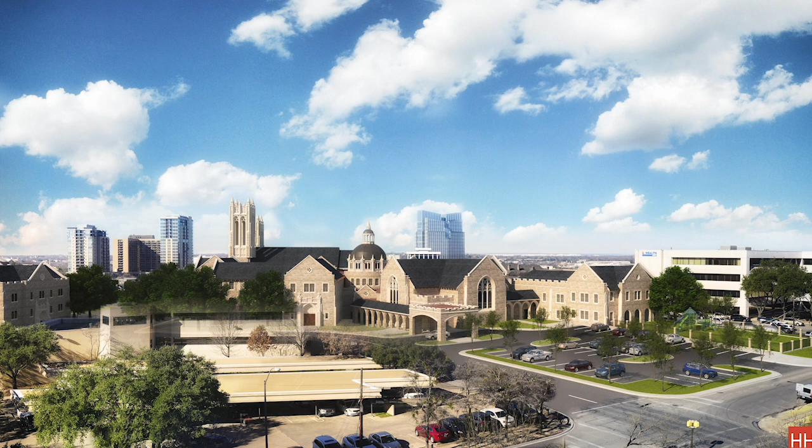Before we take a look at the master plan vision, let's look back on what has happened over the past year and a half or so.

We had a congregation-wide meeting to present the master plan vision in the sanctuary on a Sunday afternoon in February of 2017.

In the fall and winter of last year, we went through the Focus First process of strategic discernment with renowned church consultant Susan Beaumont. The process culminated in a 2-day leadership summit in February, attended by over 100 leaders of the church. The number one priority identified by the summit was to build new facilities and renovate current facilities to meet the growth and ministry needs of the church moving forward.

The Building Study Committee has been hard at work. The architectural firm, with the approval of the trustees, proceeded with the schematic design phase. The Building Committee interviewed several firms to hire as construction consultant to work with the architects to determine the cost of the project. A joint venture of Byrne and Scott Tucker construction companies was selected. And after interviewing 4 capital campaign consulting firms, we selected the firm called Culture of Ready.

Your Building Study Committee has done a stellar job. On your screen, you see the names of members of the committee. Barry Hudson, lifelong member of the church, is chair of the committee, and Tom Birchfield was added recently to the committee to ensure the accessibility of our facilities.

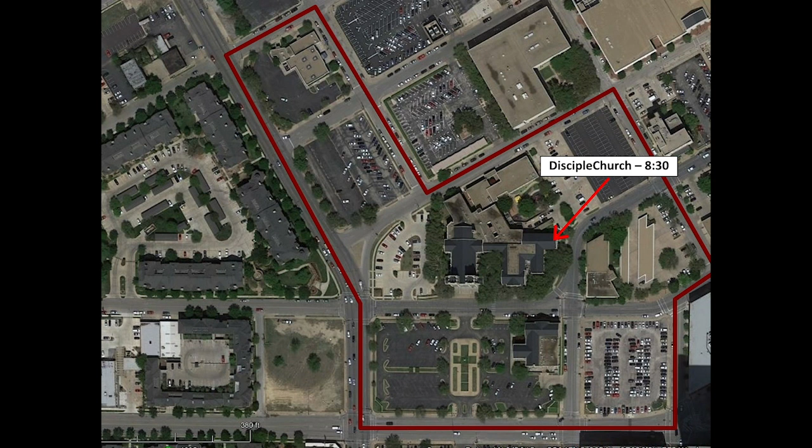Disciple Church meets at 8:30 in the Leonard Memorial Chapel. Traditional worship takes place in our sanctuary at 9:30 and 11. The Gathering is a worship service that takes place at 9:30 and 11 in Wesley Hall.

The 11:11 worship service takes place in leased space at the Center for Transforming Lives, adjacent to our property to the east. These are the primary services which are included in our worship attendance count, but there are other worship opportunities that happen on Sunday morning as well.

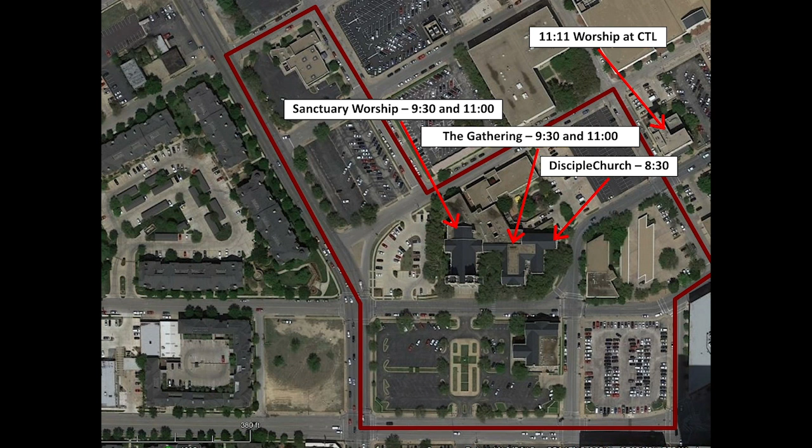Youth worship at 9:30 is part of the Sunday school hour, and a brief communion service takes place in the chapel at 10:35.

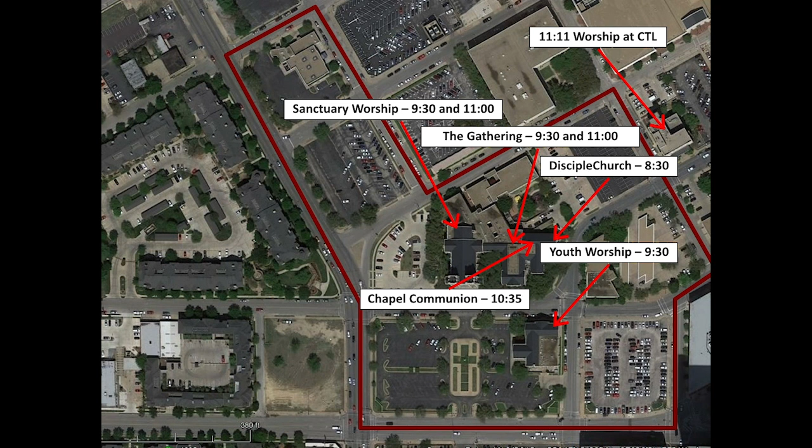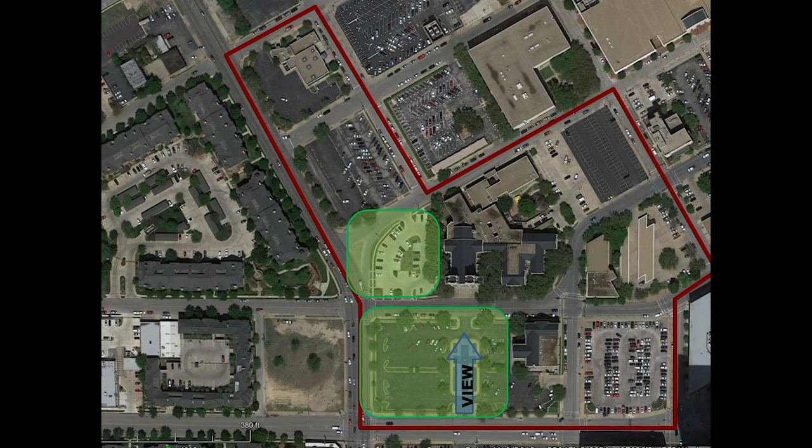In the facility planning process, the Building Study Committee was careful to protect the primary views of our beautiful historic sanctuary. The expansion of the footprint, therefore, for the building is to the east.

Here you see the view from the south of the existing facilities back to the point of the new construction. And now you see the view of what the facilities will look like when the new construction is complete.

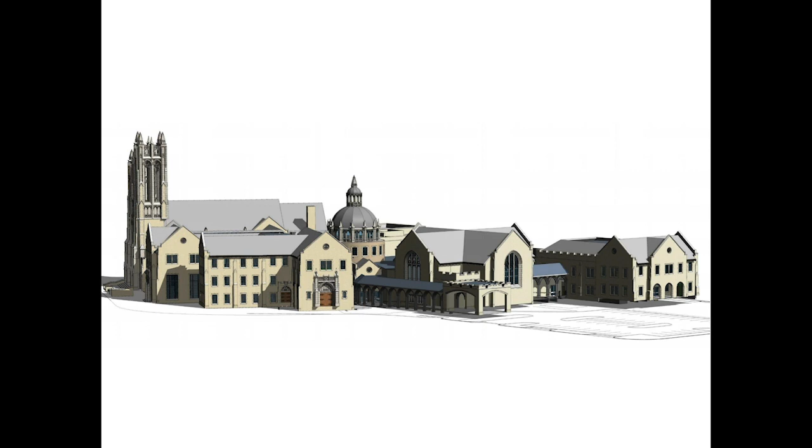What you see here is the first floor plan that includes both existing and new facilities and how they fit together.

Notice that everything revolves around a central rotunda. This helps tremendously with wayfinding. If you enter from the west, you go directly into the rotunda. If you enter from the south through the courtyard, you go directly into the rotunda. And if you enter from the east, you go directly into the rotunda.

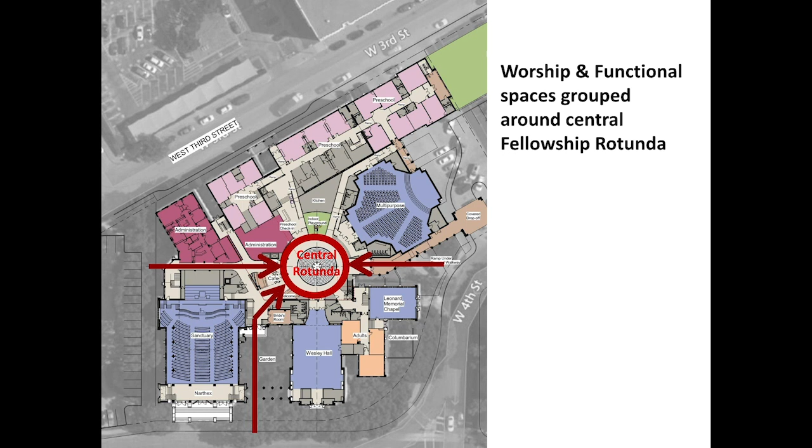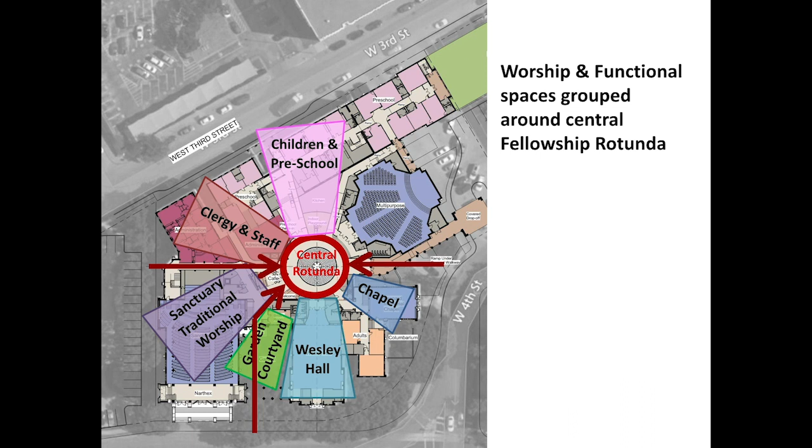And once there, you can access most of the ministry areas of the church: children and the preschool through a secure check-in area, the clergy and staff offices, the sanctuary, the garden courtyard, Wesley Hall, the chapel, and the multi-purpose worship and dining space.

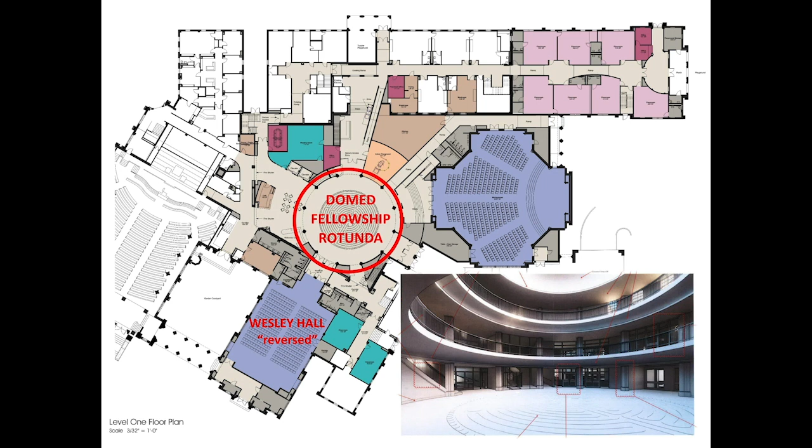So what are the primary features of the plan? Well, Wesley Hall is renovated so that the direction is reversed, so that you enter Wesley Hall from the central rotunda. A beautiful domed rotunda is at the heart of the facilities.

A large multi-purpose room for events, for dining, and for non-traditional worship, and an expansion of the children's wing.

At the heart of our facilities will be the fellowship rotunda. In the terrazzo floor will be a beautiful, permanent 42-foot prayer labyrinth.

The indoor playground in the children's area will be visible from the rotunda, and there will be a cafe to enhance our hospitality and fellowship in that beautiful space.

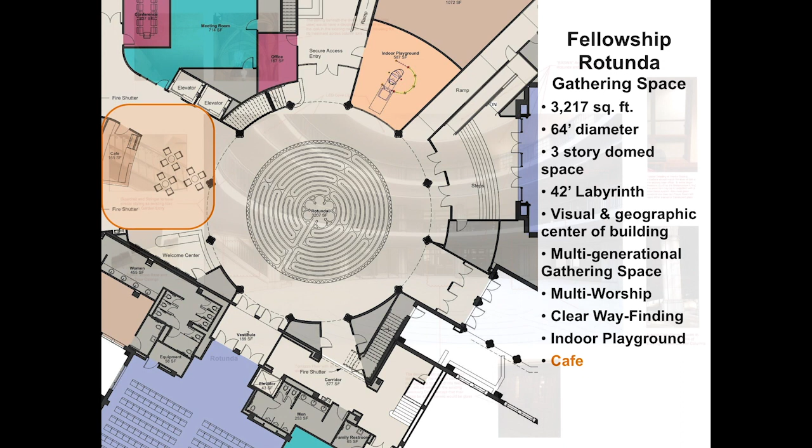Here's a rendition of the rotunda showing how the architecture and finishes of the space are in keeping with our beautiful historic building.

Imagine Sunday morning. People can see one another and visit with one another in this beautiful space. Guests can find their way around and learn about the church in this space. Imagine the sense of community. Imagine how alive this space will be.

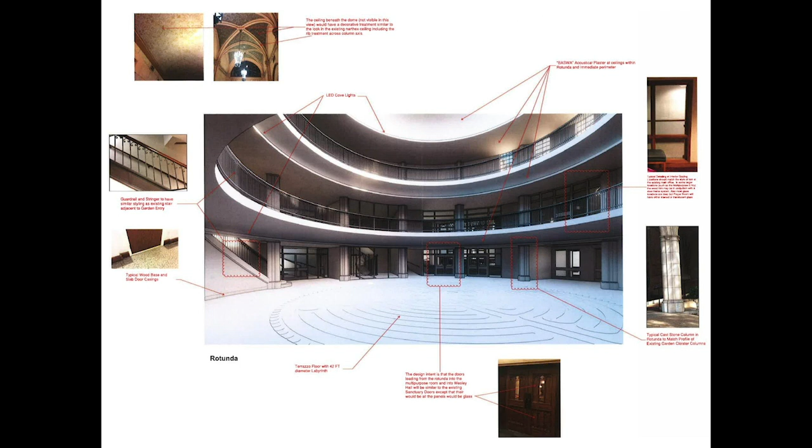This cutaway of the rotunda shows how it's structured and how it fits in with the overall facilities.

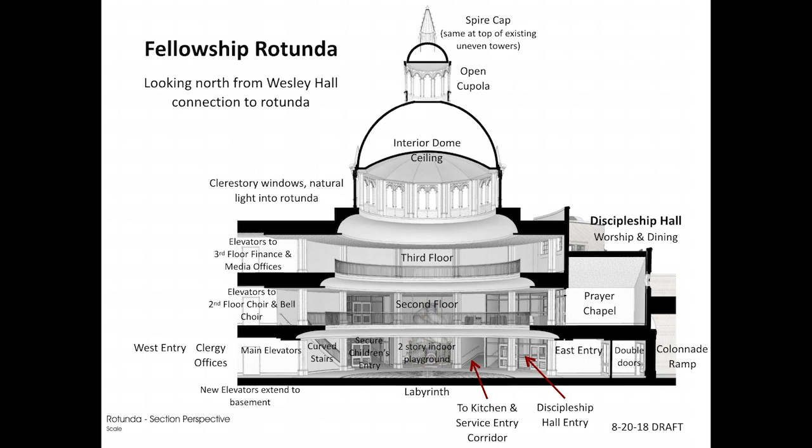Another feature of the first floor is the multi-purpose dining and non-traditional worship space. Here you see the room in the configuration for worship or for a presentation such as a large lecture or a dramatic presentation.

There are 514 seats in this configuration. Also, there's banquet seating for 320, or for 432 with the platform.

It will be a beautiful 3-story vaulted space with multimedia capacity. It's about 2.5 times the size of Wesley Hall, and there will be new adjacent restrooms and an enlarged commercial kitchen.

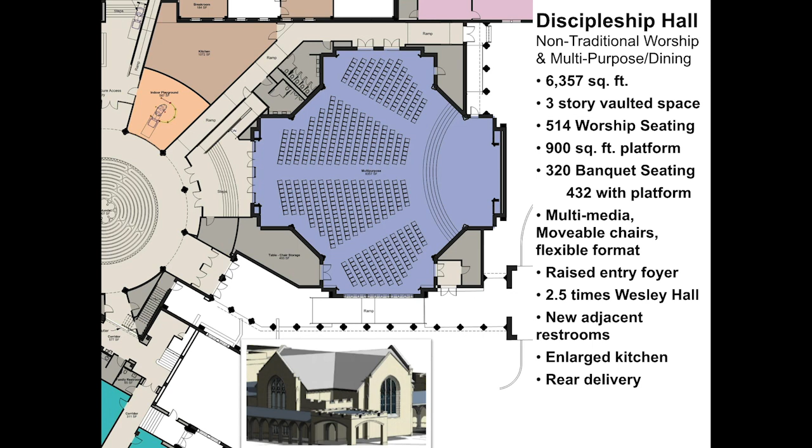Here are renderings of the space, demonstrating that this isn't just a big box, but it is architecturally in keeping with our current facilities. Imagine worship experiences, large lectures, dramatic presentations, or community events in this beautiful space.

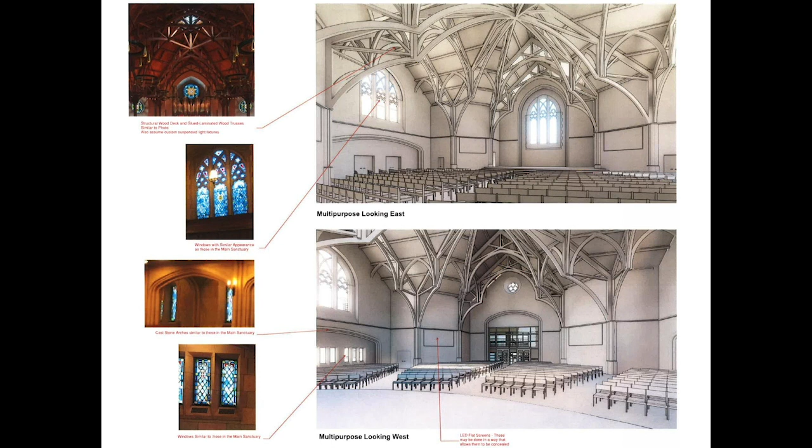Creating this new heart of our campus and keeping the building relatively compact requires demolition of part of our current facilities, with a footprint of about 5,200 square feet.

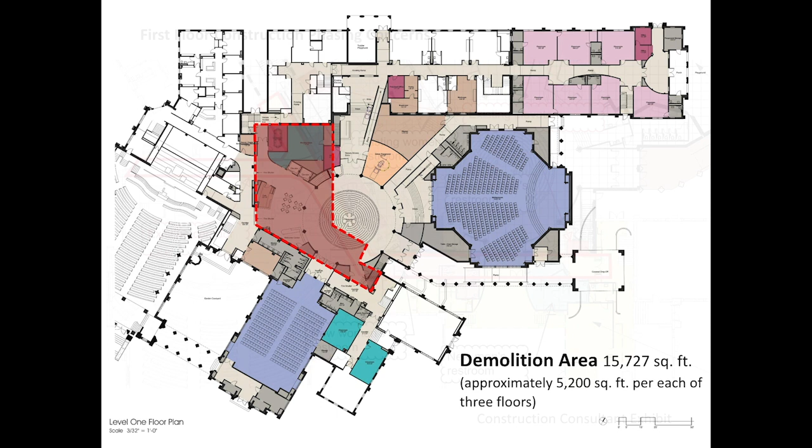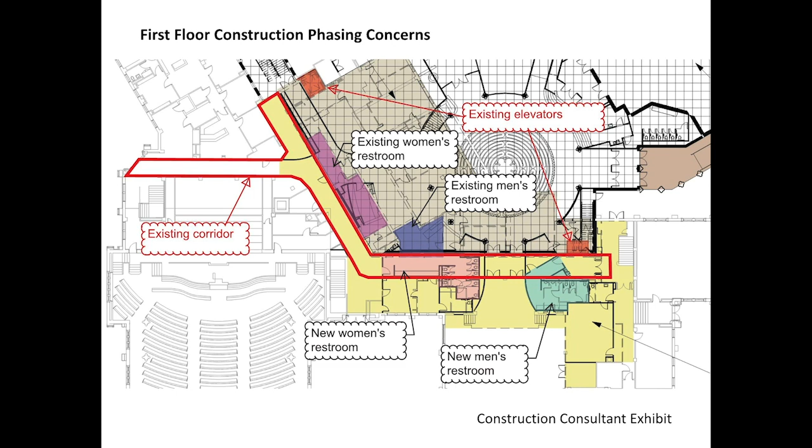So you may be asking, how will we continue to function during construction? Well, there is a plan, and it involves building new first-floor restrooms and a new elevator, along with a temporary corridor for full access to the various areas of the building.

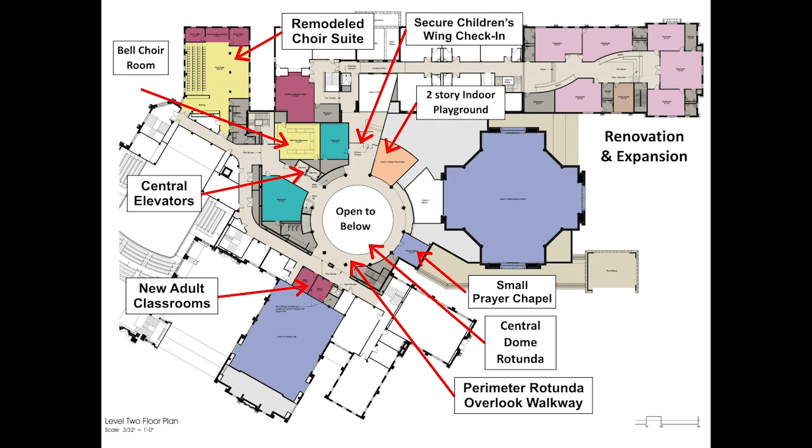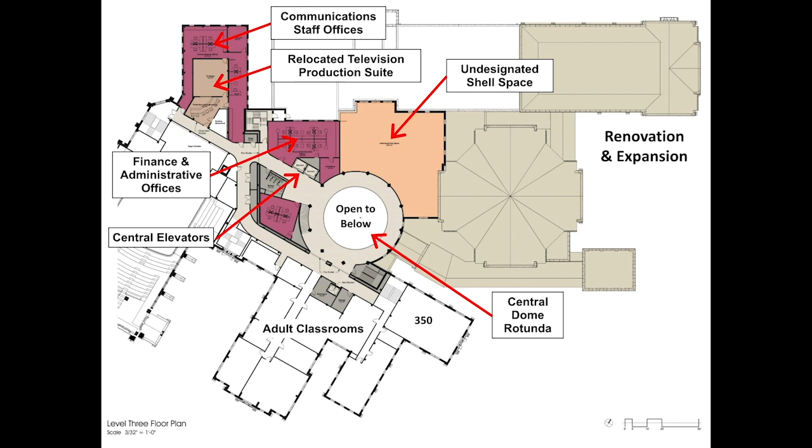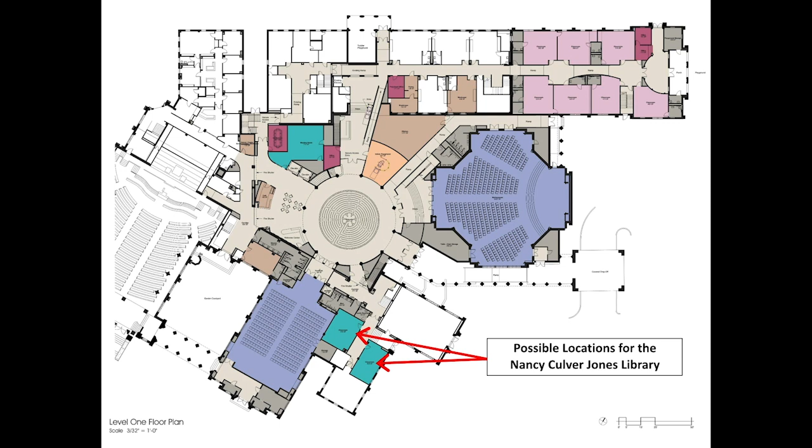We've already looked at the relocation of elevators, restrooms, and the TV production suite. What about the Nancy Culver Jones Library, which is also in the demo area? This hasn't been determined, but there are 2 possible locations on the first floor for the library, 3 possible locations on the second floor, and a possibility on the third floor as well.

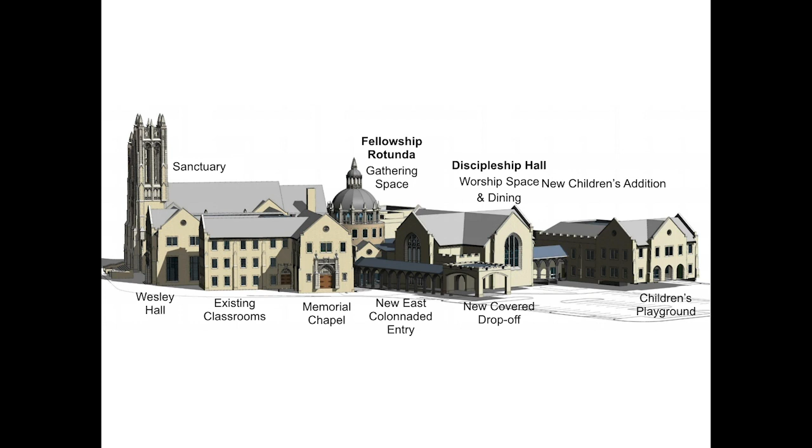So here's a view of the completed facility, showing the sanctuary, Wesley Hall, existing classrooms, the chapel, the fellowship rotunda, the new east colonnaded entry with covered drop-off, the multi-purpose dining and worship space, the new children's addition, and just off to the right of the new children's addition is the new secure playground.

Much of the HVAC and plumbing equipment in the church is very old. Some of it is original. There will be a new central plant located on the roof of the new children's wing addition. This central plant will serve the entire main building, old and new, with new equipment replacing old equipment. This is a major upgrade in efficiency.

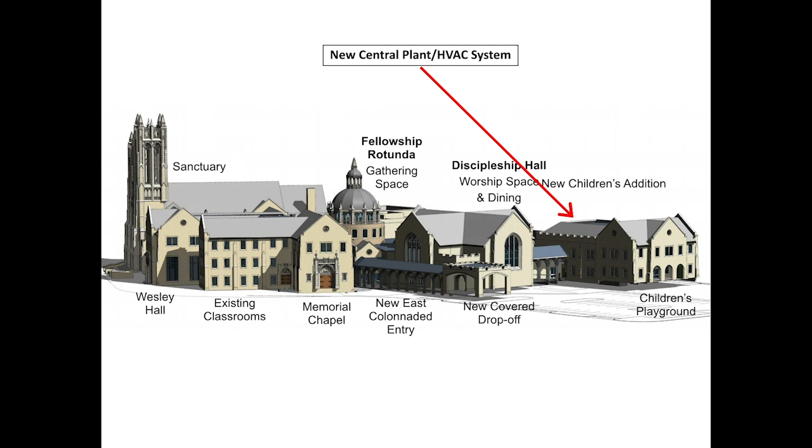Here's a perspective from the east showing some of the detail on the domed fellowship rotunda. The dome harkens back to the dome church building that housed the congregation on the corner of 7th and Taylor Streets before the church relocated to the present site.

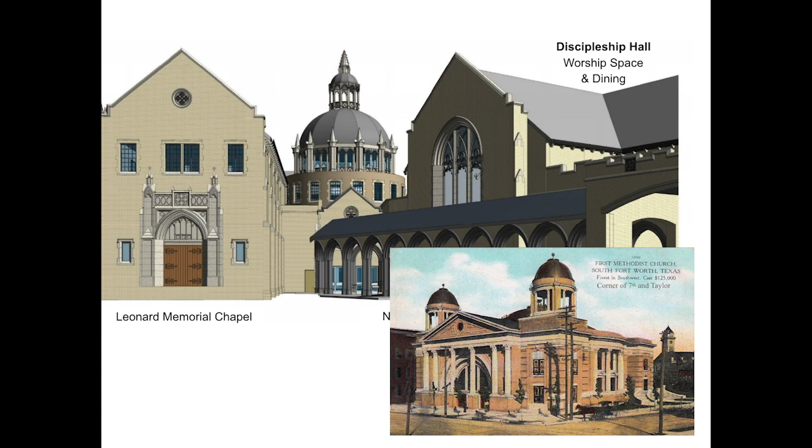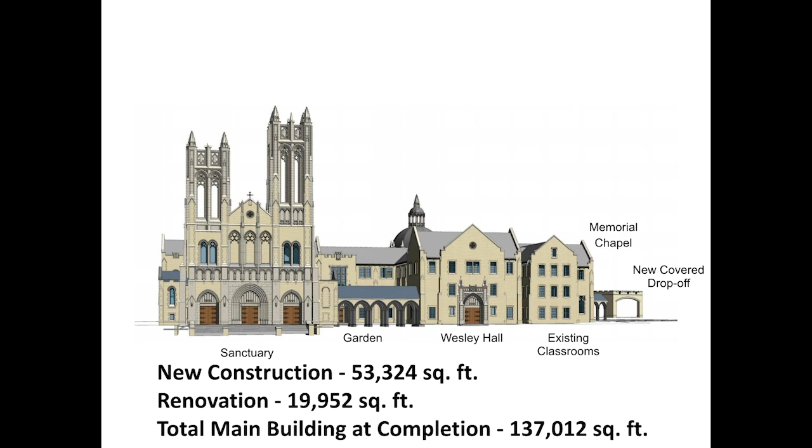The new construction totals 53,324 square feet. 19,952 square feet will be renovated. The total main building at completion will be 137,012 square feet. Here's where the church worshiped 90 years ago.

It was at the corner of 7th and Taylor Streets. Notice the central dome and the 2 domed structures at the front corners. 90 years ago, the church made the bold decision to relocate to the current location to enable the ministries of the church to thrive over the succeeding 90 years.